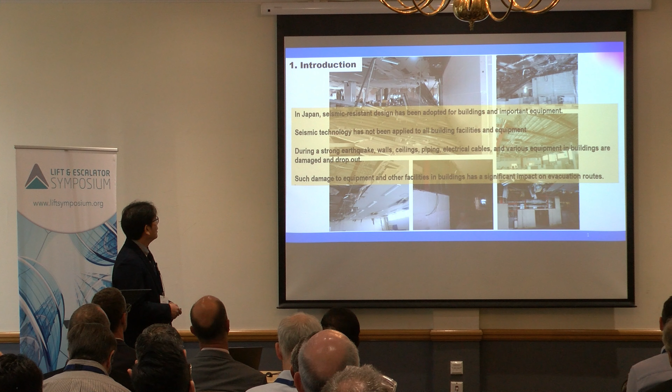Japan has had a lot of huge earthquakes in recent years. During strong earthquakes, the walls, ceiling, piping, electrical cables, and various equipment in the building are damaged and drop onto the floor. Such seismic damage to equipment and other facilities in the buildings has a significant impact on the evacuation route.

For example, if a strong earthquake occurred in this room, the ceiling and the electric equipment may fall down on the floor. In Japan, people need to pay attention to such seismic damage in daily life. As I explained earlier, lifts and escalators cannot be used as evacuation routes.

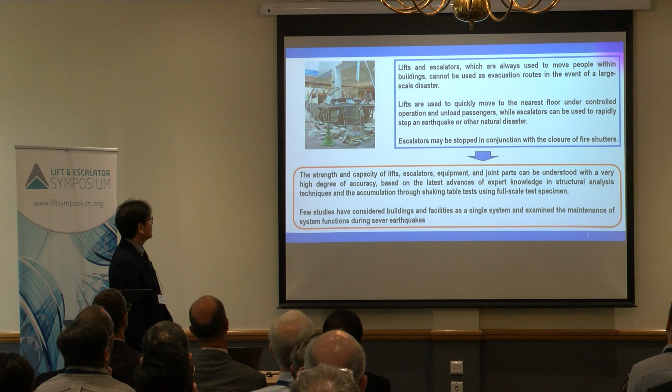However, the strength and capacity of lifts, escalators, equipment, and especially the joint part, meaning the part connecting to the architectural structures, can be understood with a very high degree of accuracy based on the latest advances in structural analysis techniques and accumulation through shaking table tests using full-scale test specimens. That means we can estimate with high accuracy the fragility of the equipment for the evacuation route.

Few studies have considered the building and the facilities as a single system and examined the maintenance of system function during severe earthquakes. So this examines the concept of the appropriate evacuation route based on pedestrian simulations, considering damage events to mechanical structures related to the selection of an evacuation route. We consider such contents in this presentation.

Pedestrian simulations in 40-story high-rise buildings are conducted to quantitatively evaluate the time required to complete evacuation and to analyze the effectiveness of using lifts and escalators for rapid evacuation.

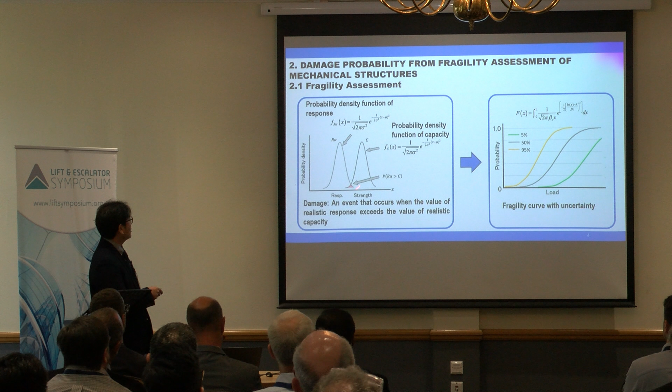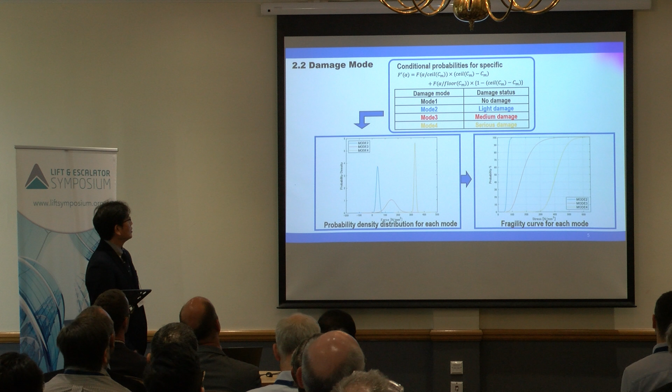In this figure, the red area means the seismic damage probability. Also, we consider the conditional probability for specific damage states as shown in this table. Mode 1 means no damage, and mode 4 serious damage. In each table, we can obtain the fragility curves and the probability distribution for each damage mode.

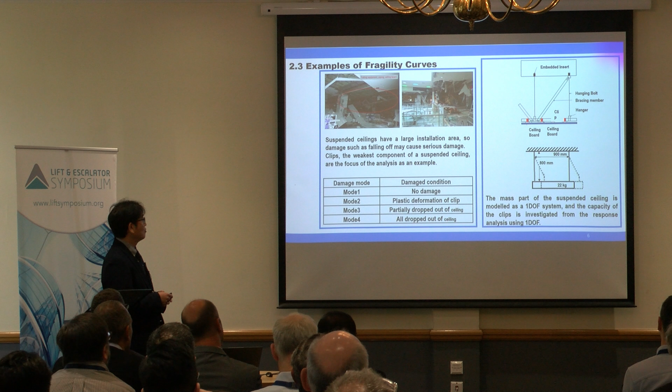Next, I'd like to show you an example of fragility curves of the equipment. As shown in these pictures, suspended ceilings have a large installation area, so damage such as falling off may cause serious damage. The clips, here, the weakest component of the suspended ceiling, are the focus of the analysis as an example. The damage conditions are summarized in the table and the analytical model is shown in these figures.

The mass part of the suspended ceiling is modeled as a 1 degree of freedom system, and the capacity of the clips is investigated from the response analysis using 1 degree of freedom systems. As a result, the ceiling damage probability of a clip is summarized as shown in the table.

In this case, the seismic waves are the El Centro NS and the JMA Kobe NS. These are very famous input waves for seismic design. And fragility curves are obtained, shown in the figures, for each damage mode.

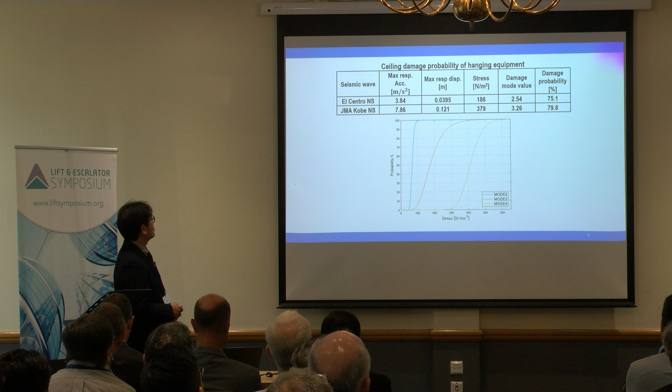This time, the damage conditions are summarized in this table, and the analytical model is shown in these figures. The suspension length is 800 millimeters with 4 bolts, and the equipment weight is 22 kilograms. As a result, as before, the damage probability of the hanging equipment is summarized as shown in the table and the figures.

Next, I'd like to show you the influence coefficient from pedestrian simulations. Generalizing pedestrian evacuation routes against obstacles and understanding the trend of routes according to the size of the obstacle and the degree of path dominance will contribute to the improvement of evacuation safety from the stage of designing equipment layout in buildings.

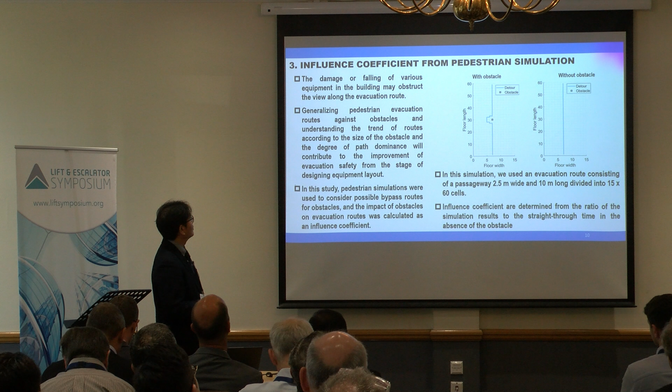So pedestrian simulations were used to consider the possible bypass routes for obstacles, and the impact of obstacles on the evacuation route was calculated as the influence coefficient. Here we can see these figures. The blue line shows the detour, and the black square is the obstacle.

In the simulation, we used an evacuation route consisting of a passageway 2.5 meters wide and 10 meters long, divided into 15 and 60 cells. And the influence coefficient is determined from the ratio of the simulation result to the straight-through time in the absence of obstruction.

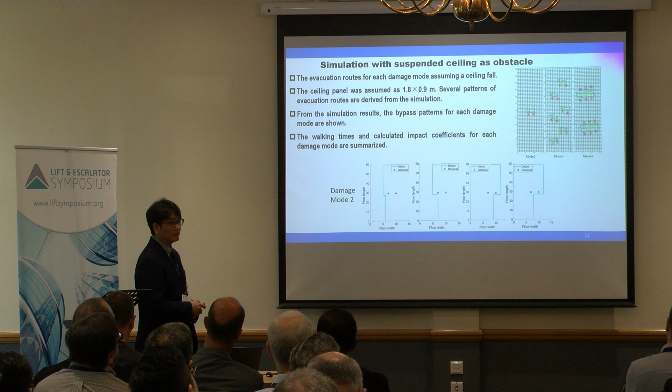For the evacuation route for each damage mode, assuming a ceiling fall, the ceiling panel was assumed at 1.8 by 0.9 meters. Several patterns of evacuation route are derived from the simulation. From the simulation results, the bypass patterns for each damage mode are shown in these figures. For mode 2, mode 3 and mode 4, there are several patterns of the same seismic damage, and we can see the evacuation route pattern.

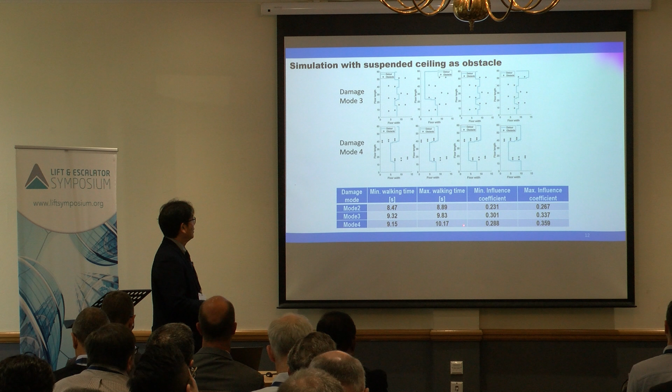This figure differs in the starting point of the evacuation. In this case, damage mode 2, damage mode 3 and damage mode 4. As a result, the influence coefficients are summarized in the table. An influence coefficient of 0 means passable without any obstacles, and 1.0 means totally impassable conditions.

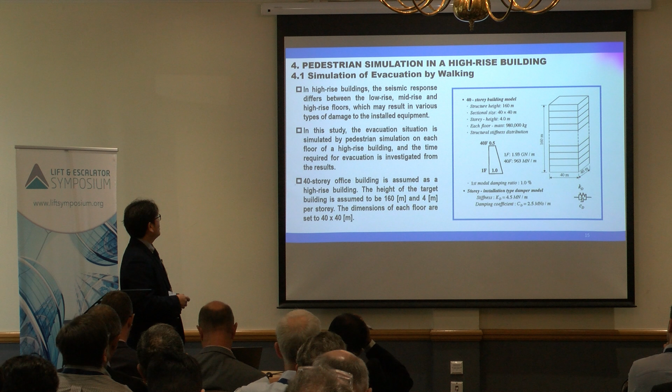In high-rise buildings, the seismic response differs between the low, middle, and high-rise floors, which may result in various types of damage to the installed equipment. The evacuation is simulated by the pedestrian simulation on each floor, and the target building is 160 meters with a 4 meter story height, and the dimensions of each floor are set to 40 by 40 meters.

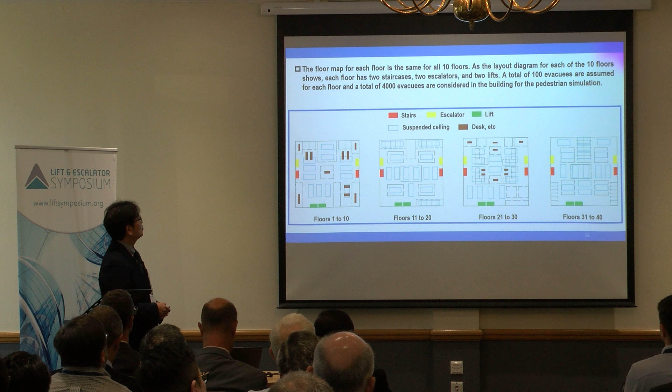And the floor map for each floor, the layout diagram for each of the 10 floors, is shown. Each floor has two staircases here, 2 escalators here, and 2 lifts here. A total of 100 evacuees are assumed for each floor, and a total of 4,000 evacuees are considered in the building for the pedestrian simulations.

The cells of the floor map grid are numbered, and the simulation is performed by moving to a cell with a smaller number than the current cell. The walking speed of an evacuee is 1.00 meter per second.

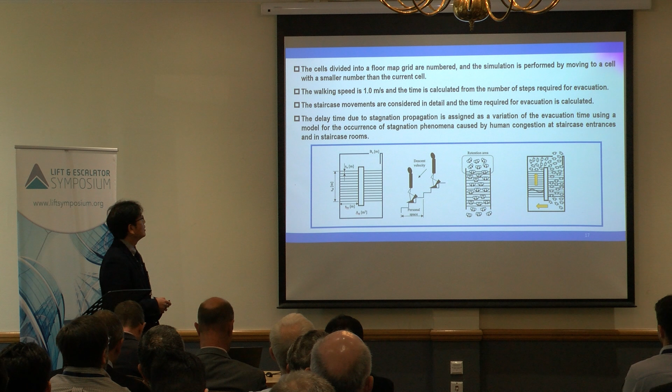This is an estimated value, and the staircase movements are considered in detail, and the time required for the evacuation is calculated. The delay time due to stagnation propagation is assigned as a variation of the evacuation time using a model for the occurrence of stagnation phenomena caused by human congestion at staircase entrances and in staircase rooms.

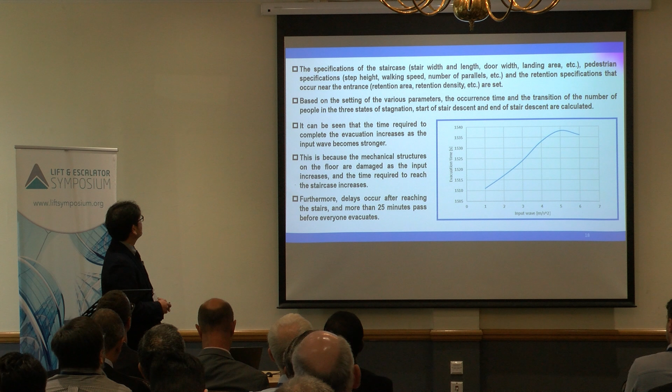Based on the setting of the various parameters, the occurrence time and the transition of the number of people in the 3 states of stagnation, start of stair descent, and end of stair descent are calculated. It can be seen that the time required to complete the evacuation increases as the input wave becomes stronger. The horizontal axis means the input wave level of the seismic input, and the vertical axis is the evacuation time. So the delays occur after reaching the stair, and more than 25 minutes pass before everyone evacuates.

And next slide shows the simulation of evacuation by using the escalator. The fragility analysis for the escalator was already reported in a previous symposium, this symposium. So please refer to the fragility analysis for the escalator in the report. In this time, the escalator travel during evacuation is assumed to be accompanied by walking.

In this case, the speed of the escalator is 0.5 meter per second, and the speed walking on the stairs is 0.6 meter per second. By combining these two speeds, the speed of movement using the escalator is assumed as 1.1 meter per second. The length of the escalator is assumed to be 8 meters.